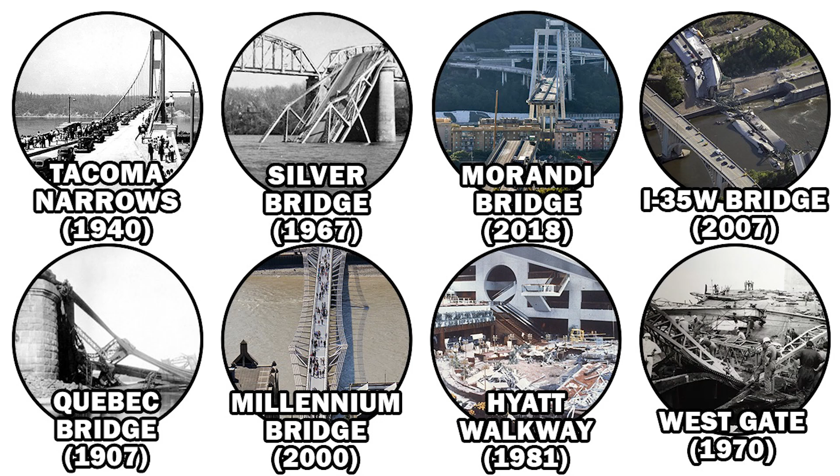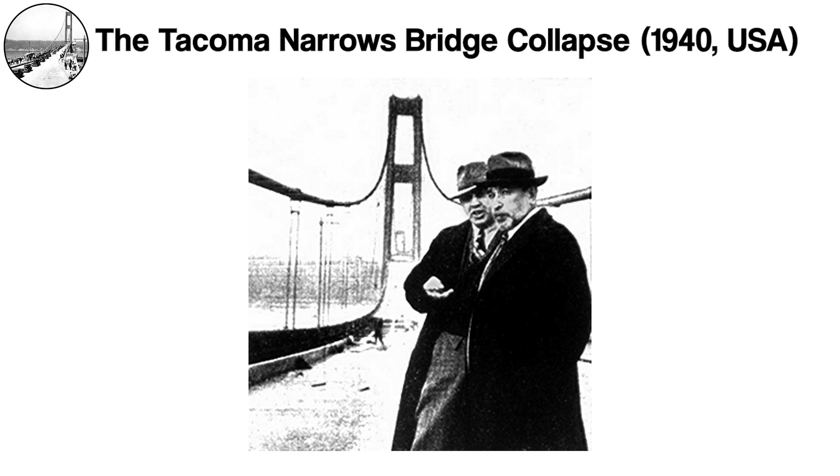Have you ever seen a bridge twist and turn like a ribbon in the wind? On November 7th, 1940, the Tacoma Narrows Bridge, nicknamed Galloping Gertie, shocked the world by doing just that, collapsing into Puget Sound. When it opened just 4 months earlier, it was praised as a sleek, modern design. However, engineers overlooked one crucial detail, which is how wind could affect its slim, flexible structure.

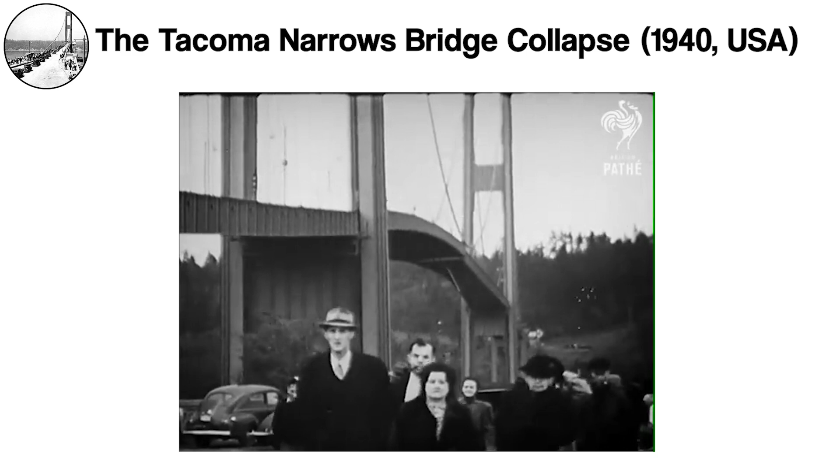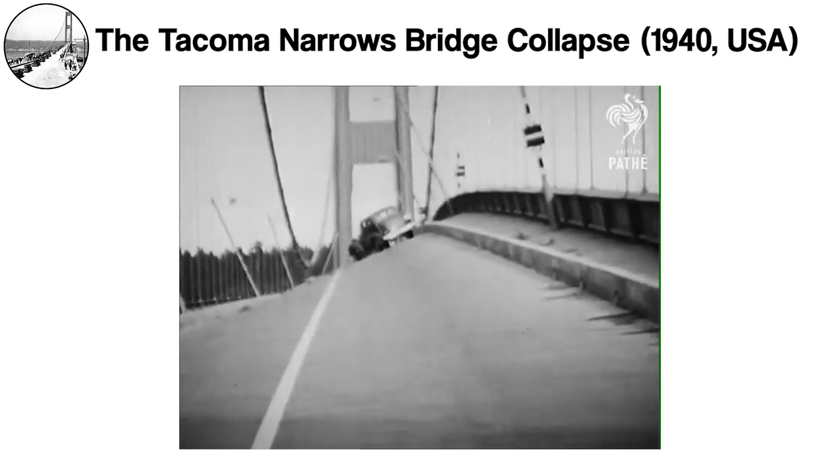On that fateful day, strong 40-mile-per-hour winds created aeroelastic flutter, a phenomenon where wind causes vibrations that grow stronger and more destructive. The bridge began to sway, twist, and buckle as horrified drivers abandoned their cars to escape. Within hours, the cable snapped, the road crumbled, and the entire structure tumbled into the icy waters below. While no people were hurt, a dog trapped in a car was tragically lost, adding to the heartbreak.

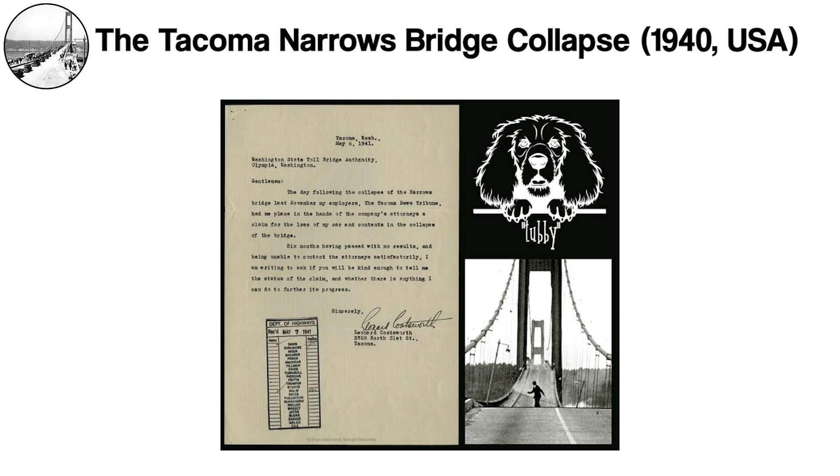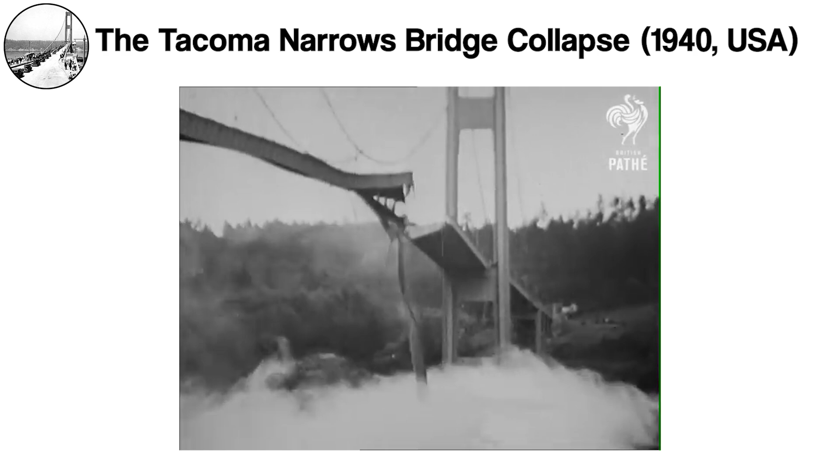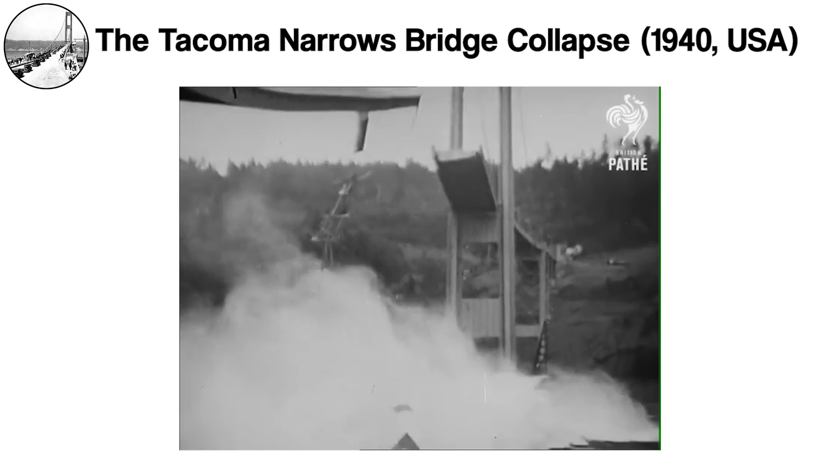The collapse became one of the most infamous engineering disasters in history, teaching a vital lesson that nature's forces must never be underestimated. The haunting footage of Gertie's collapse still fascinates people today, reminding us of the fine line between innovation and disaster. The dramatic footage captured by newsreels shocked the public and became a symbol of engineering gone awry, sparking widespread discussion about safety and innovation.

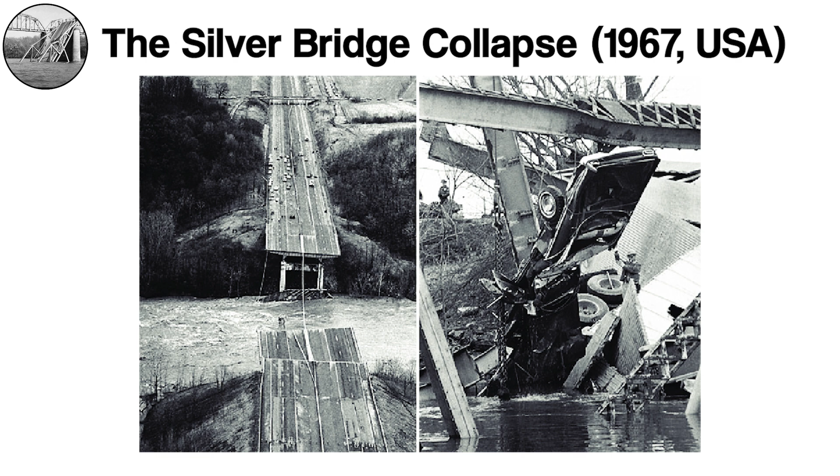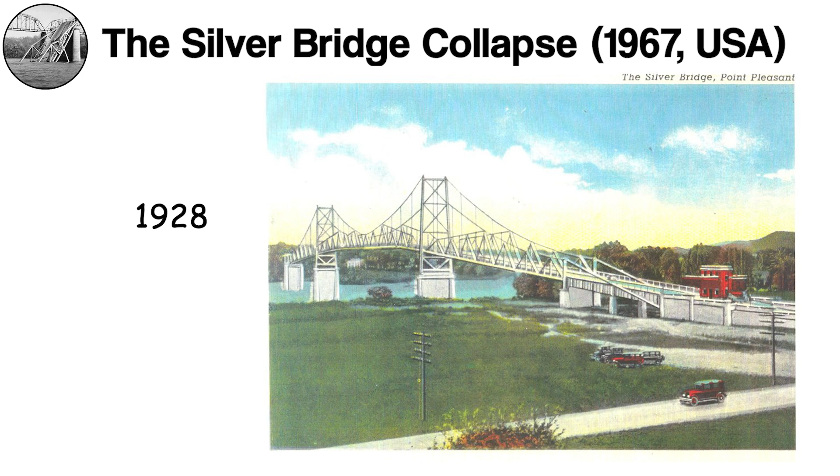What if the bridge you cross every day suddenly gave way, plunging cars into icy waters below? That nightmare became reality on December 15th, 1967, when the Silver Bridge, connecting Ohio and West Virginia, collapsed during rush hour, resulting in the loss of 46 lives. Built in 1928, the Silver Bridge was a marvel of its time, using a unique eyebar chain suspension design. But decades of wear, heavier traffic, and poor maintenance turned this engineering innovation into a ticking time bomb.

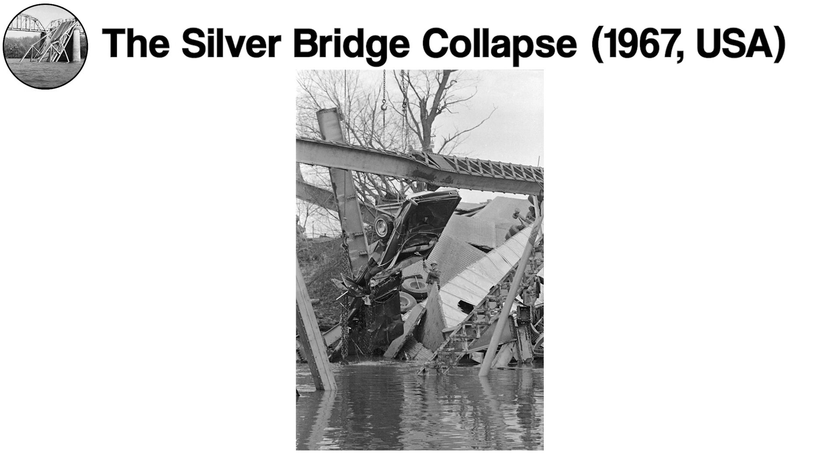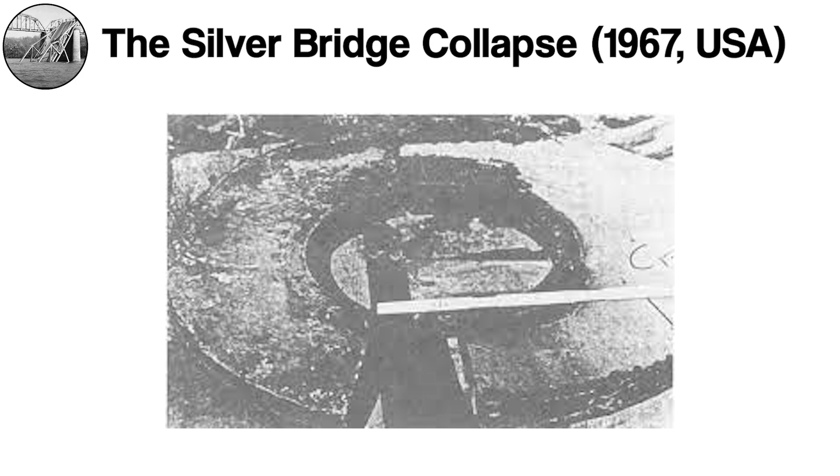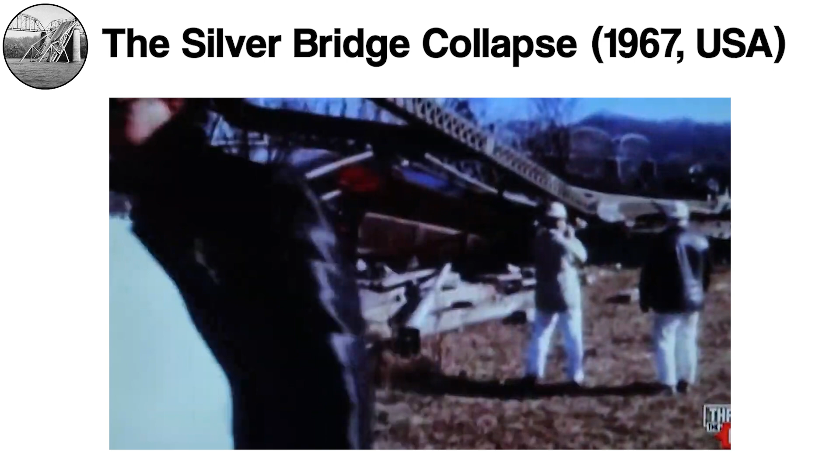On that fateful day, a single eyebar, a critical piece of the bridge's support system, fractured due to a microscopic crack. This tiny flaw caused a catastrophic chain reaction, and within a minute, the entire structure crumbled, sending vehicles and passengers into the freezing Ohio River. Rescue efforts were hampered by the swift current and freezing temperatures, making the tragedy even more devastating. Investigators discovered that the eyebar design had no redundancy, meaning if one piece failed, the whole structure would collapse.

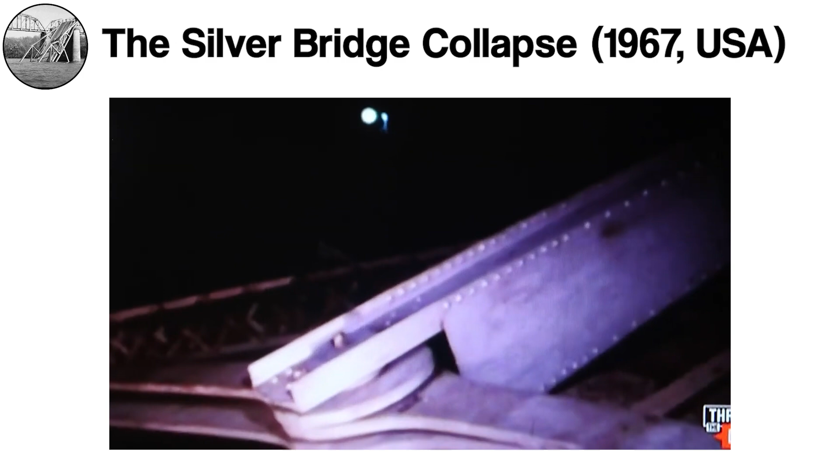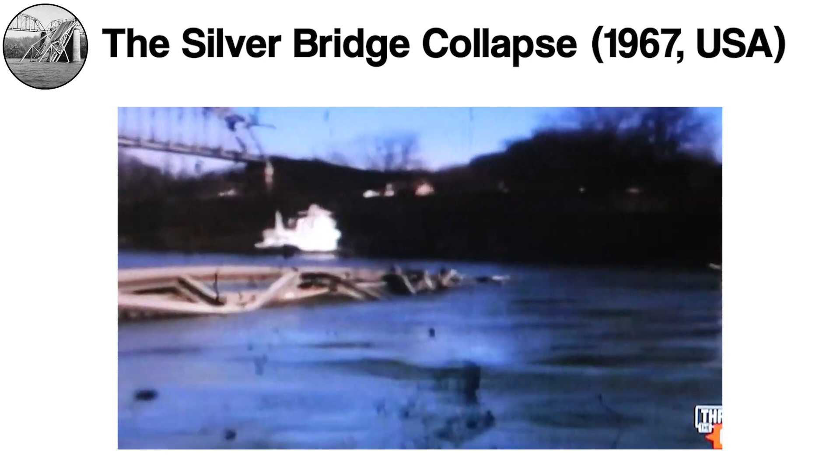The Silver Bridge disaster shook the nation, leading to sweeping reforms in bridge inspection and maintenance standards. Today, its collapse serves as a chilling reminder of the dangers of overlooking aging infrastructure and the need for constant vigilance. It's a lesson written in the icy waters of the Ohio River and the lives lost that winter day.

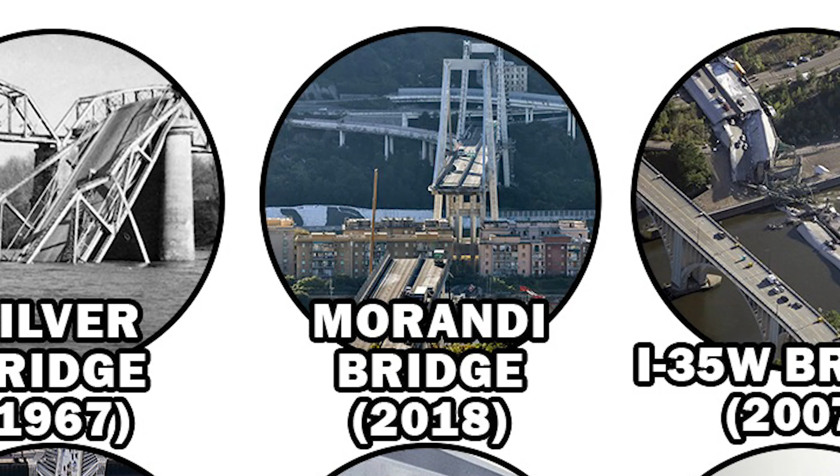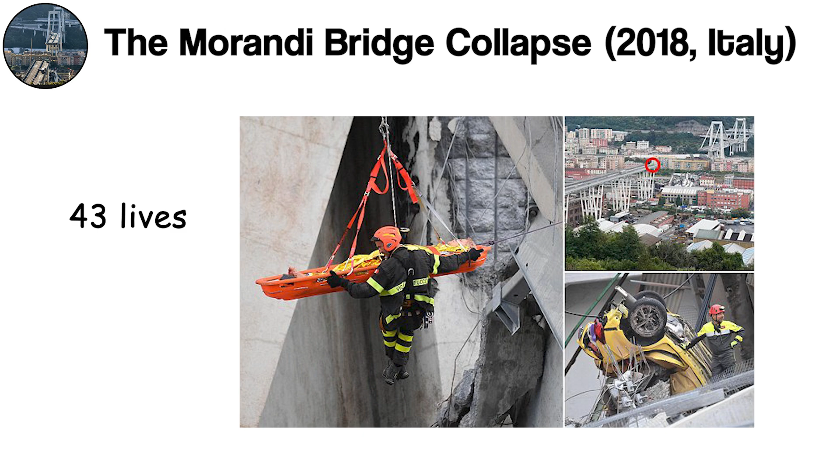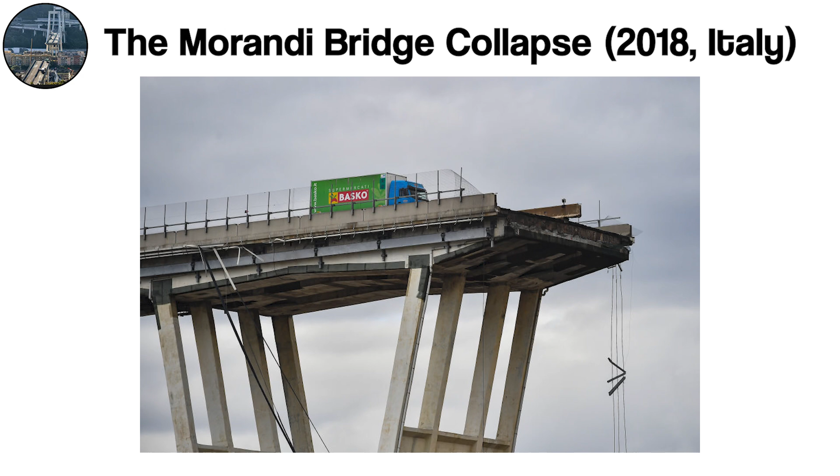On August 14th, 2018, during a heavy rainstorm in Genoa, Italy, the Morandi Bridge collapsed, resulting in the loss of 43 lives and leaving a nation in shock. The bridge, built in the 1960s, was once a symbol of modern engineering, stretching high above Genoa's busy streets and river, but decades of wear, inadequate maintenance, and design flaws made it a disaster waiting to happen.

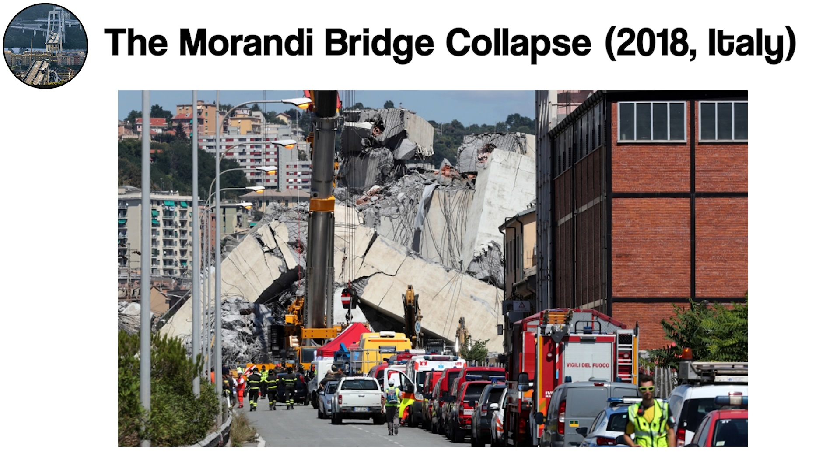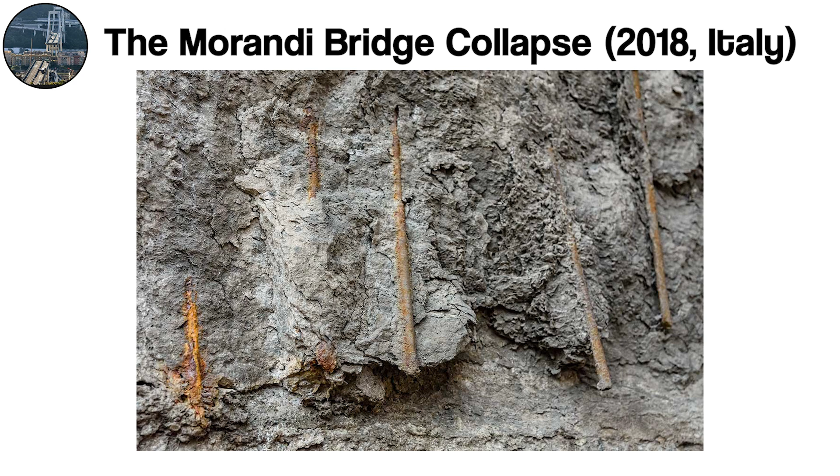On that fateful day, a 210-meter section of the bridge gave way, sending cars, trucks, and debris plummeting 45 meters to the ground below. Survivors described the terrifying moment as the bridge seemed to disappear beneath them. Investigators discovered that corrosion in the steel cables and aging concrete had weakened the bridge over time. Despite repeated warnings from engineers about its deteriorating condition, repairs were delayed with devastating consequences.

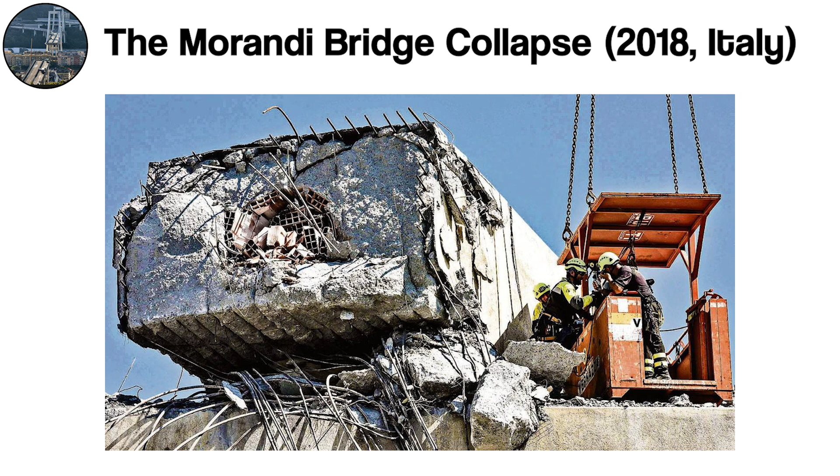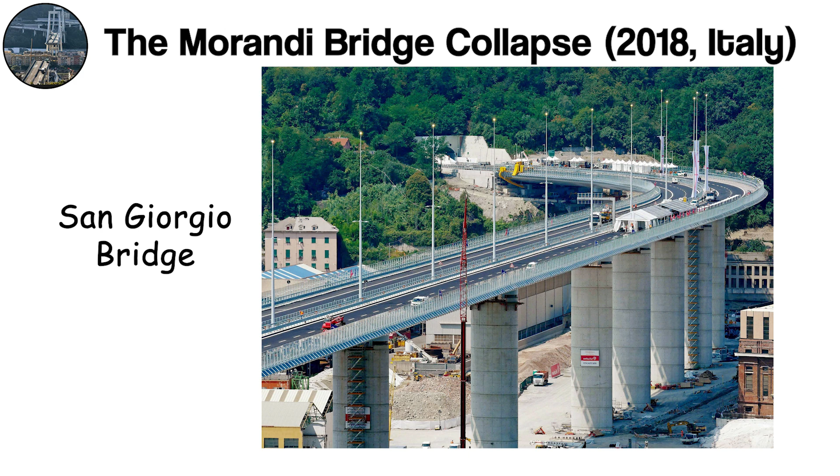The Morandi Bridge collapse became a wake-up call for infrastructure safety worldwide, sparking debates about accountability, maintenance, and modernization. Today, the new San Giorgio Bridge stands in its place, a somber reminder of the lives lost and the lessons learned. The disaster underscores a painful truth. Ignoring the warning signs of aging structures can lead to unimaginable tragedy.

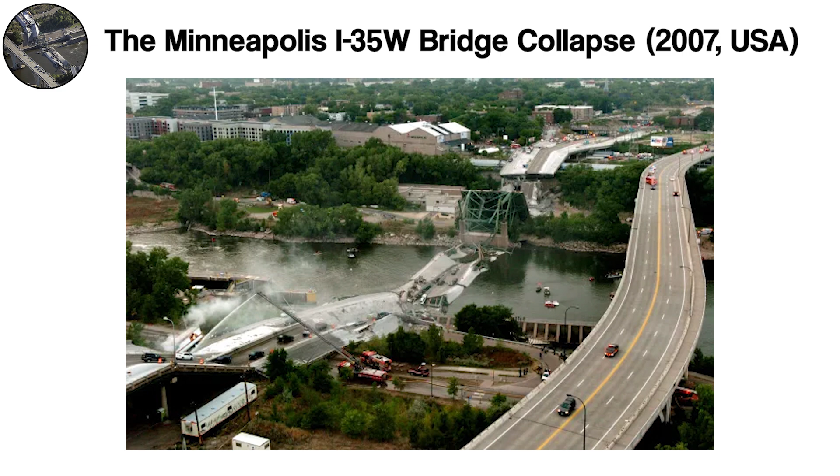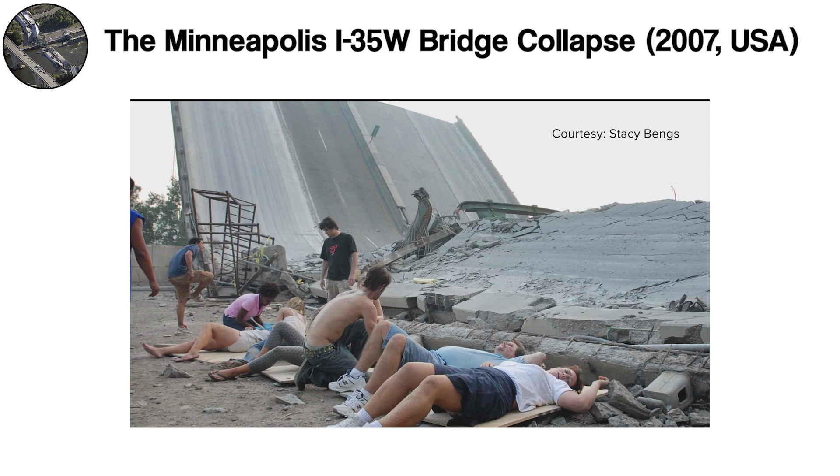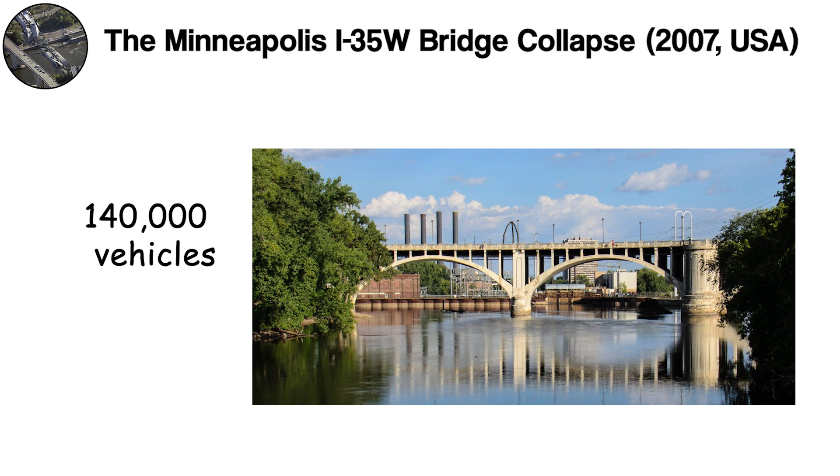It was an ordinary summer evening in Minneapolis on August 1st, 2007. Rush hour traffic crawled along the I-35W bridge, cars bumper to bumper, when suddenly the unthinkable happened. Without warning, the bridge gave way, collapsing into the Mississippi River below. In just moments, 13 lives were lost, 145 people were injured, and a nation was left grappling with how such a tragedy could occur. The I-35W bridge was a critical artery for the city, carrying over 140,000 vehicles daily. Built in the 1960s, it had been flagged for structural deficiencies years before the collapse.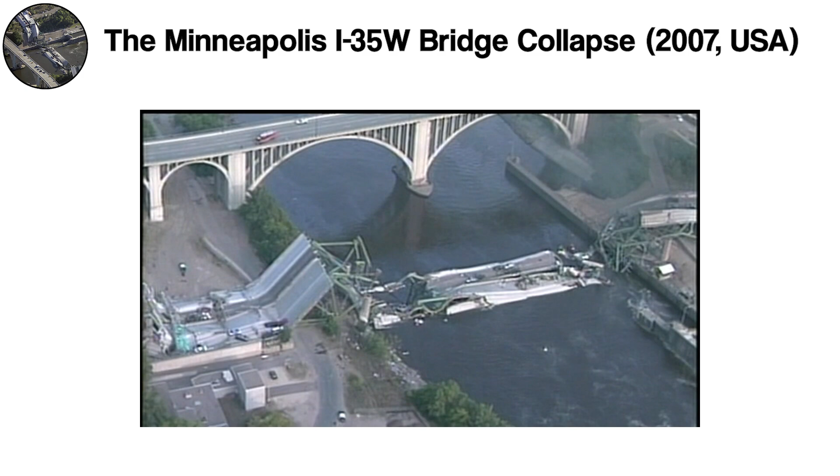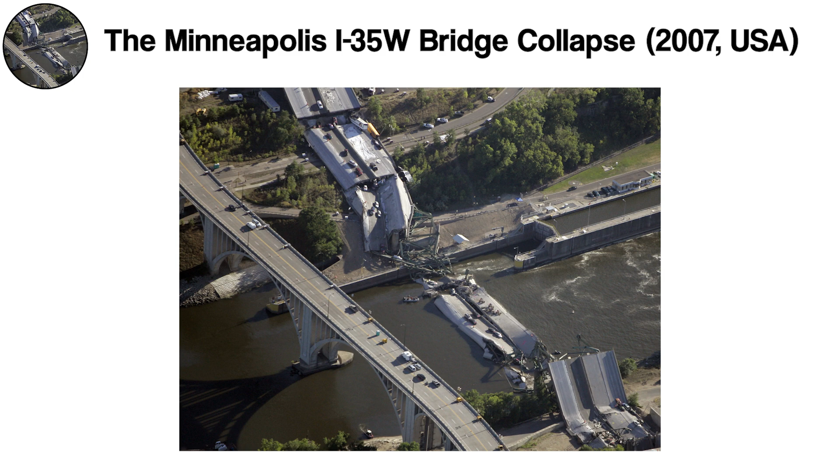But what made all of this happen? A design flaw in the steel gusset plates, key components that connected the bridge's beams. These plates were too thin to handle the increasing weight of modern traffic and repairs over decades. On that day, the bridge simply couldn't bear the load, and it failed catastrophically. Emergency crews worked tirelessly in the chaos, rescuing survivors from the river and twisted debris.

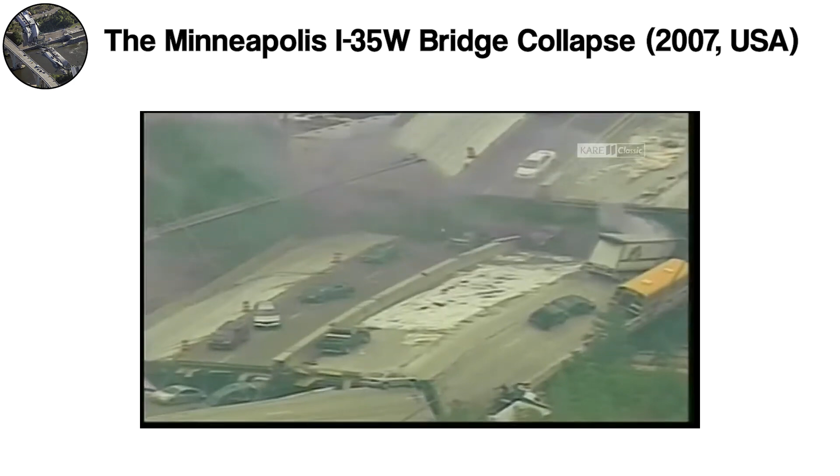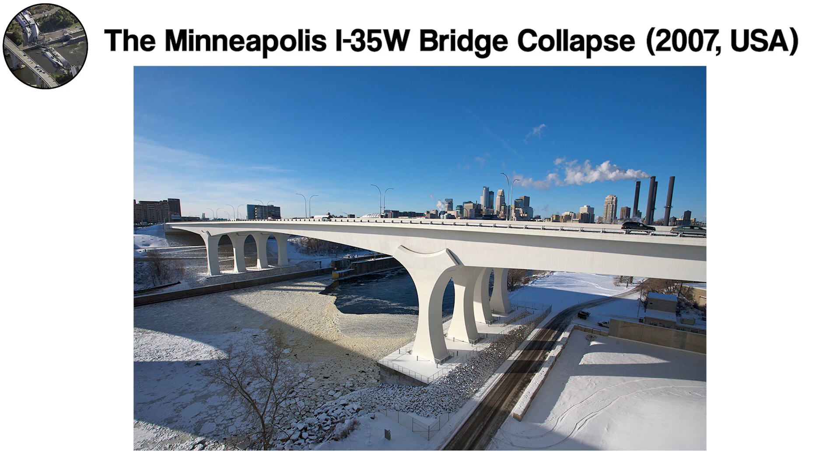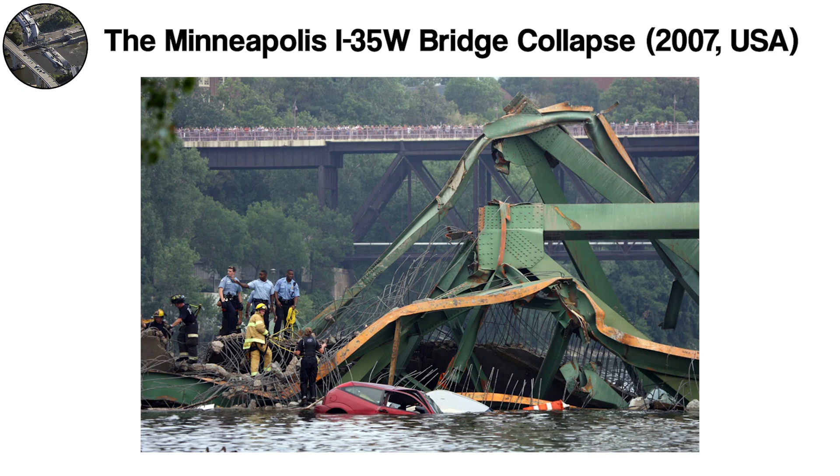The collapse prompted an urgent nationwide review of aging infrastructure, highlighting the dangers of deferred maintenance and design flaws in America's bridges. Today, the rebuilt I-35W bridge stands as a testament to resilience and innovation, but the haunting memory of that summer evening serves as a stark reminder. Infrastructure isn't just about steel and concrete, but it's about the lives it holds in balance.

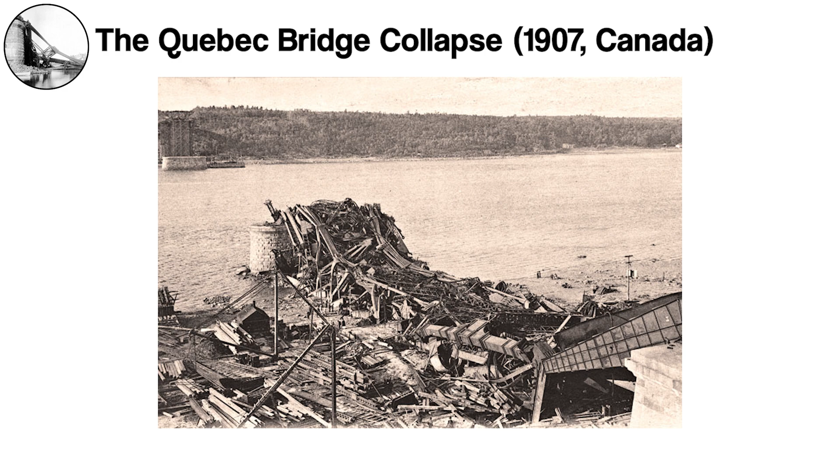What happens when an engineering marvel, designed to be the longest cantilevered bridge in the world, suddenly falls apart? That was the devastating reality on August 29, 1907, when the Quebec Bridge collapsed during construction, resulting in the loss of 75 workers and shaking the world. The bridge was a grand vision, set to span the St.

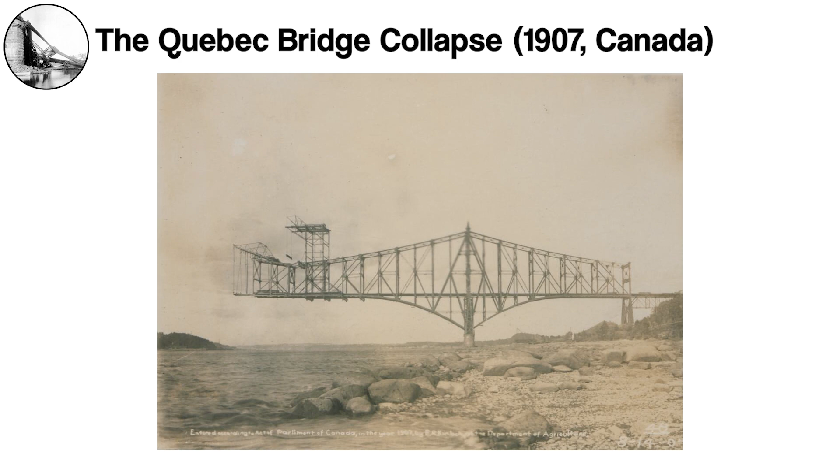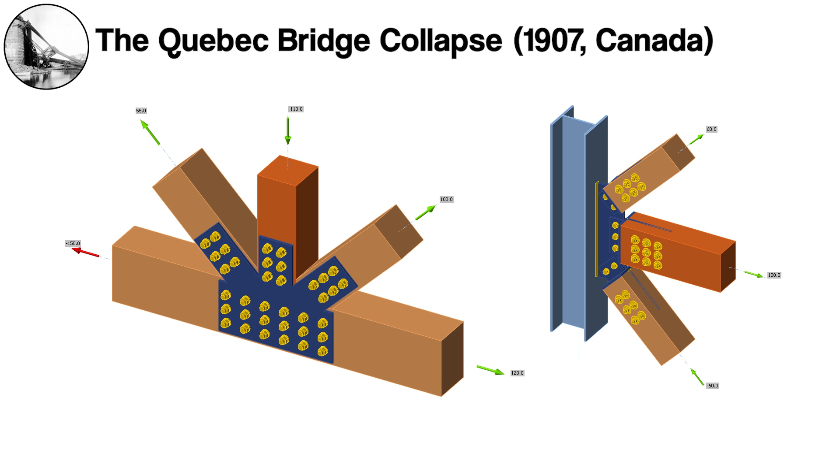Lawrence River in Quebec, Canada, and stand as a symbol of engineering excellence. But the dream was built on a flaw, an overambitious design and poor calculations. The bridge's framework relied on steel gusset plates, which were crucial to its structural integrity. However, these plates were too thin to withstand the weight of the bridge's span.

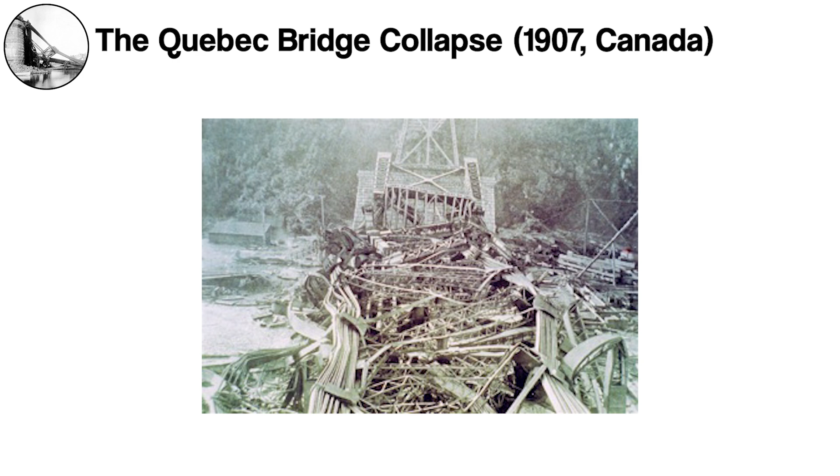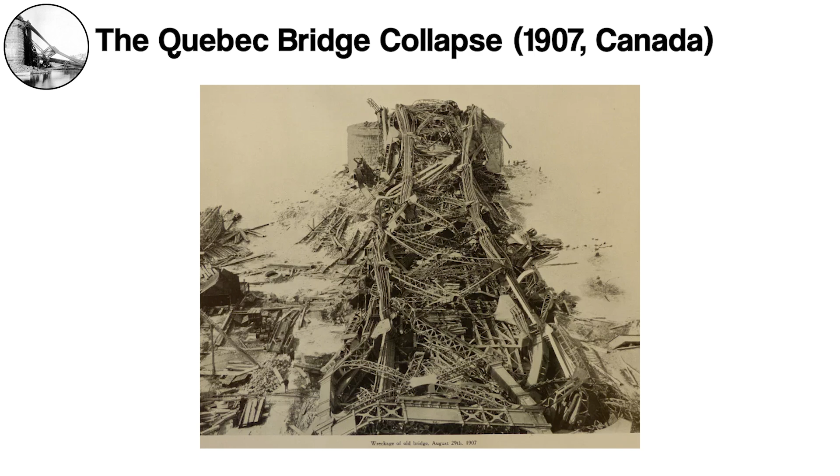On that fateful day, the stress proved too much, and the central span of the bridge plummeted into the river below. Workers, who had been diligently building the bridge, were caught in the collapse, and 75 men lost their lives in an instant. The tragedy was incomprehensible, and it sent shockwaves through the engineering community.

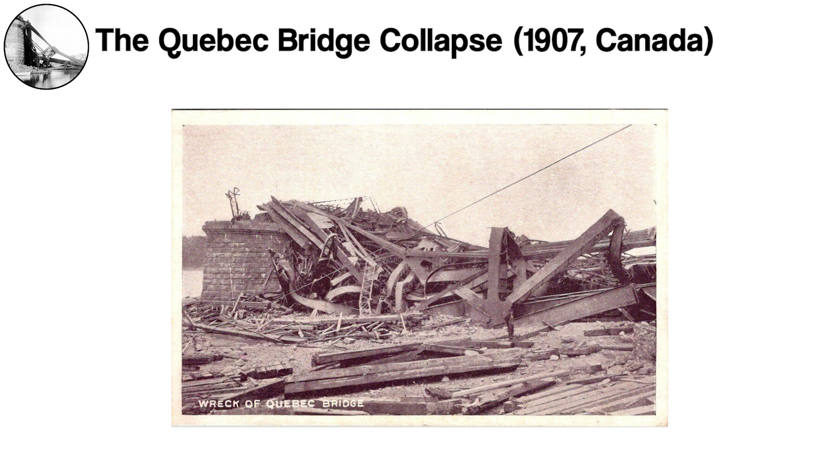Despite the catastrophic failure, the bridge was eventually rebuilt and completed in 1917. However, the Quebec Bridge disaster remains one of the most significant and heartbreaking engineering failures in history. It highlighted the dangers of cutting corners and overlooking safety, serving as a tragic reminder of how ambition can quickly turn into disaster when critical details are ignored.

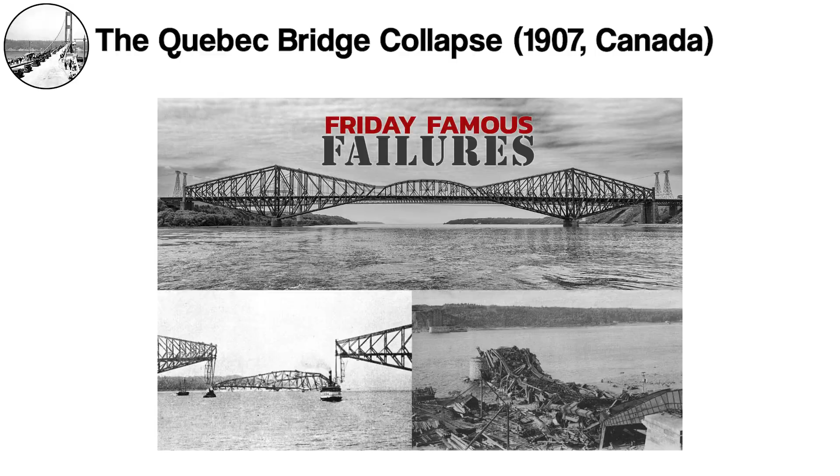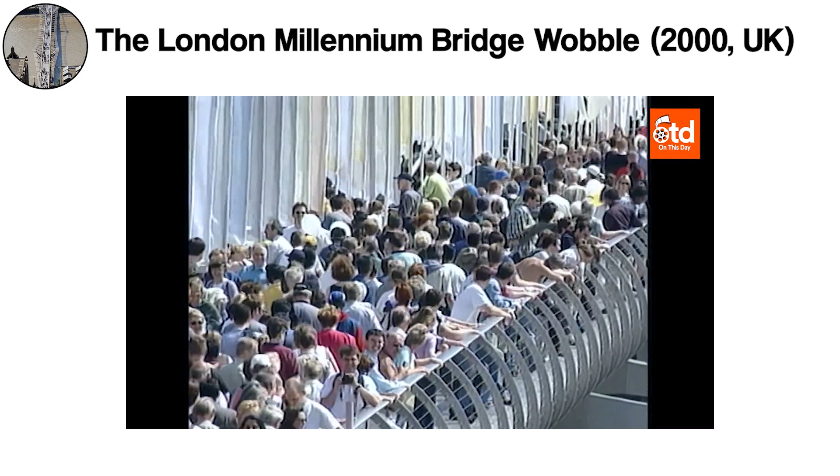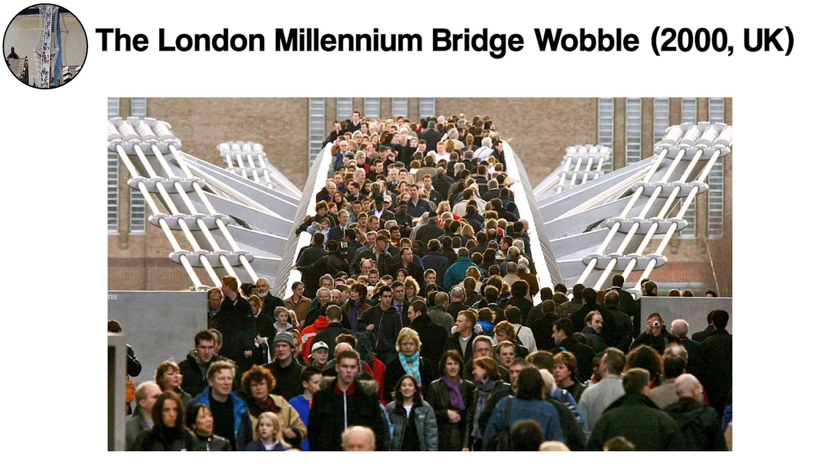Imagine walking across a brand new bridge, built to mark the turn of the Millennium, when suddenly the ground beneath you starts to sway. That's exactly what happened on June 10, 2000, when the London Millennium Bridge opened to the public and immediately became notorious for its unsettling wobble. The sleek pedestrian bridge, linking St. Paul's Cathedral with the Tate Modern, was meant to be a modern marvel, designed to carry thousands of people across the Thames with ease. But just days after its grand opening, something unexpected happened.

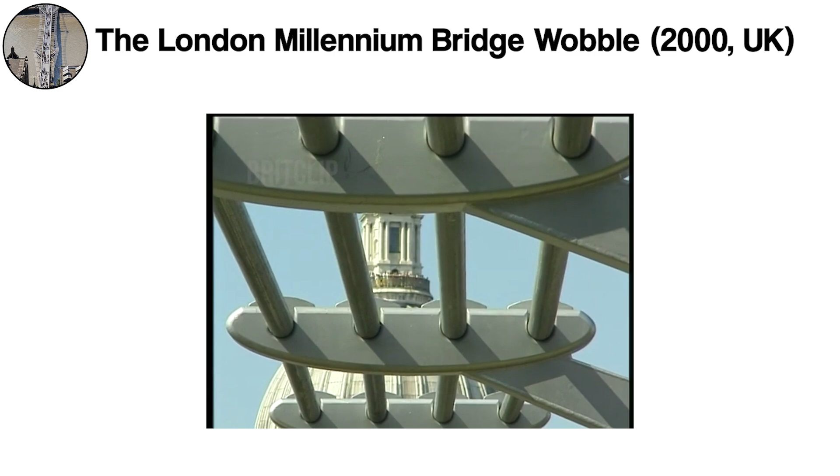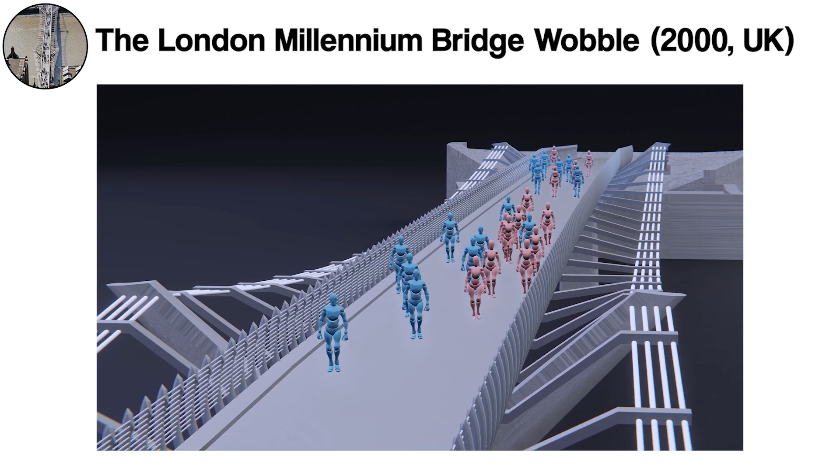The bridge began to sway under the weight of pedestrians. What seemed like a harmless design flaw quickly turned into a public safety issue, forcing the bridge to close for months. But why did this happen? Engineers discovered that the bridge's design didn't account for the way people move. As pedestrians walked in sync, their collective movement amplified the wobble, turning the bridge into a dizzying, unstable platform.

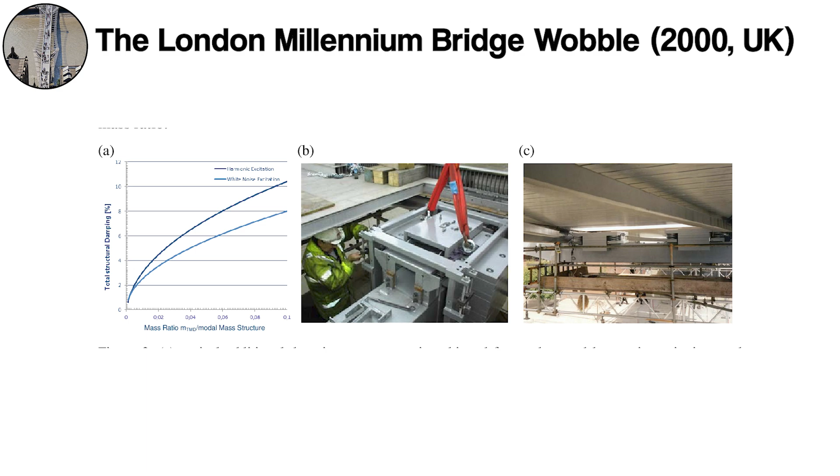After extensive modifications, including adding dampers to reduce the movement, the bridge was reopened in 2002. Today, the London Millennium Bridge is an iconic structure, but its brief wobble serves as a reminder. Even the most cutting-edge designs can have unpredictable flaws, and human behavior can play a surprising role in engineering disasters.

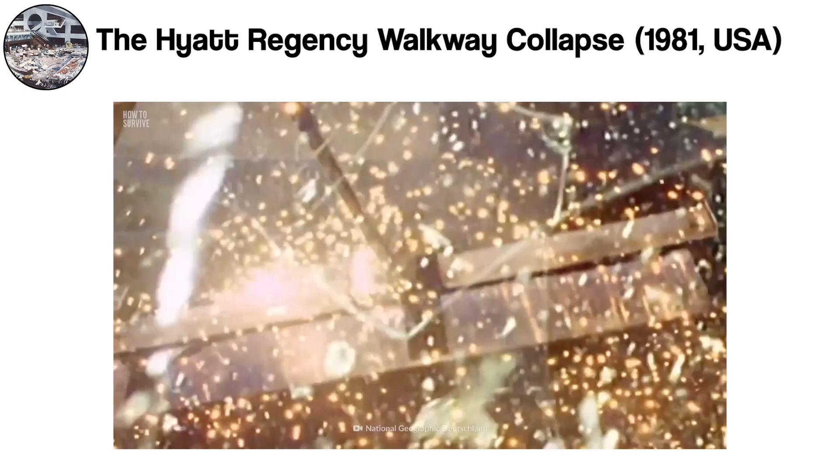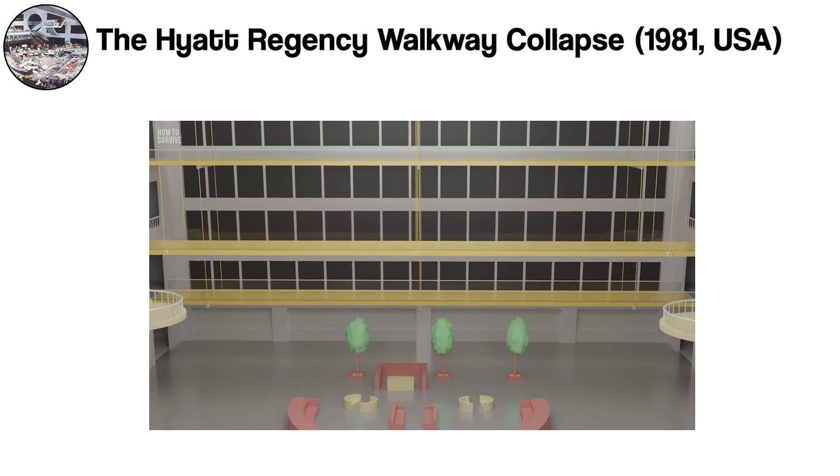What if the celebration of a lifetime suddenly turned into a deadly disaster? That's exactly what happened on July 17, 1981, when two walkways at the Hyatt Regency Hotel in Kansas City, USA, collapsed during a busy event, resulting in the loss of 114 lives and injuring over 200 people. The Hyatt Regency Hotel was a marvel of modern architecture, designed to showcase a stunning atrium with walkways suspended high above the ground. But a deadly flaw lay hidden in its design.

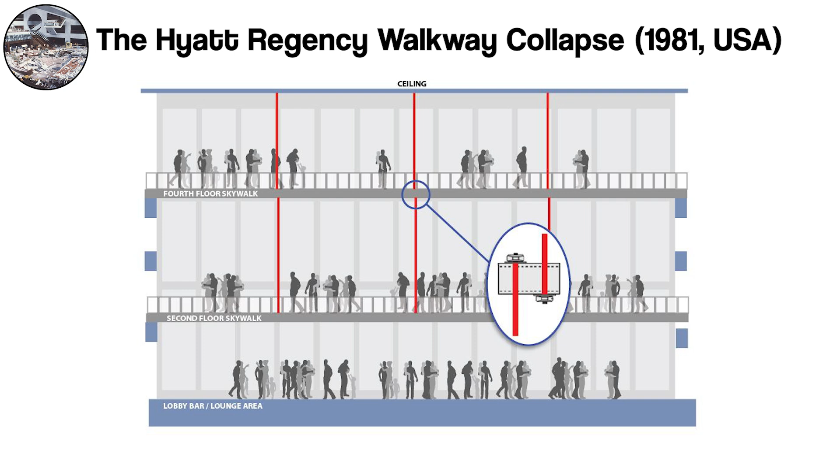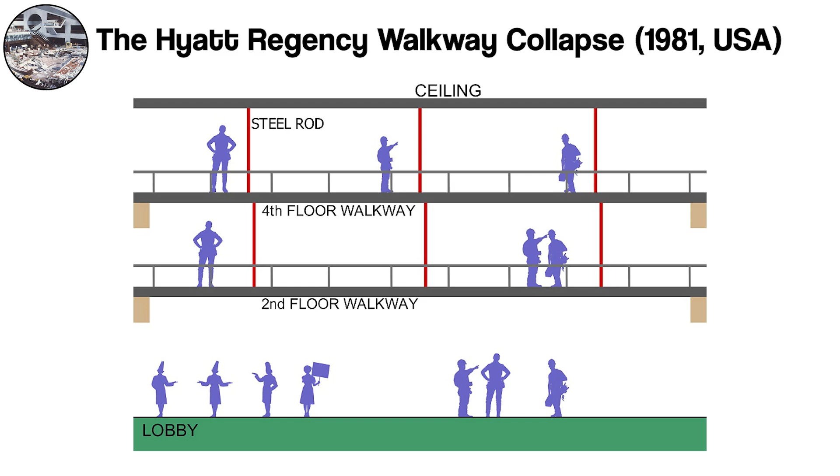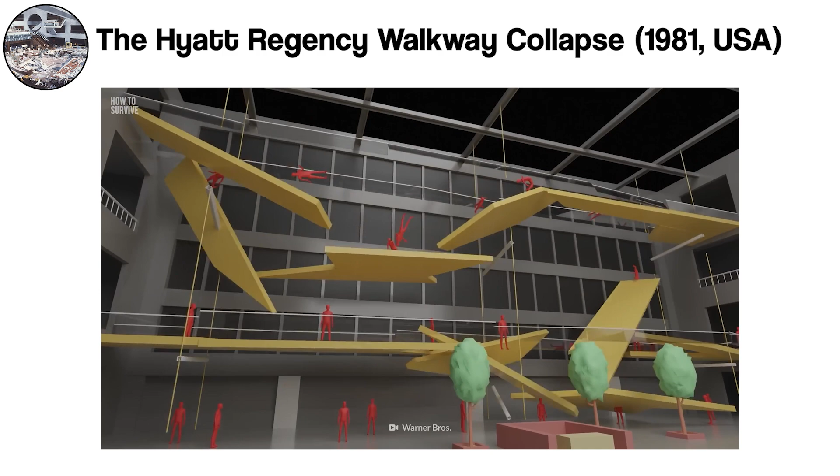The original plan for the walkways called for the suspension cables to connect to a single point. However, engineers made a last-minute change, adding a second set of suspension rods for support, without properly calculating the impact on the structure's load-bearing capacity. On that fateful night, the walkways, crowded with guests attending a ballroom dance, buckled under the weight they were never designed to bear. In a matter of seconds, 2 levels of walkways crashed to the floor below, trapping and causing loss of life in the chaos.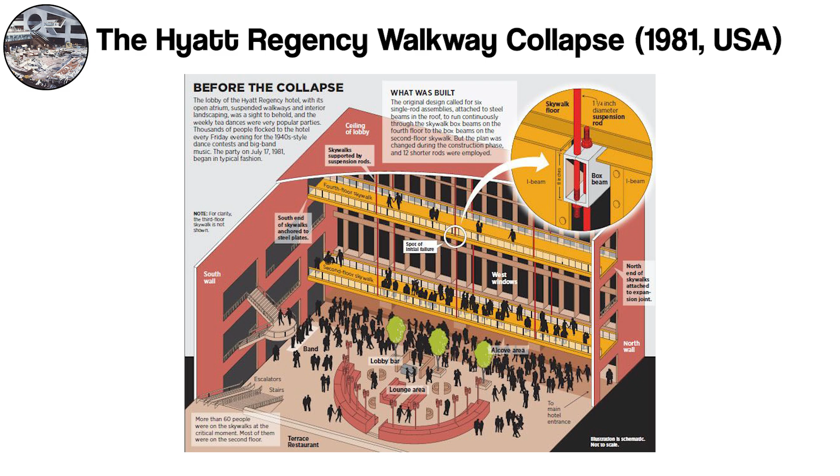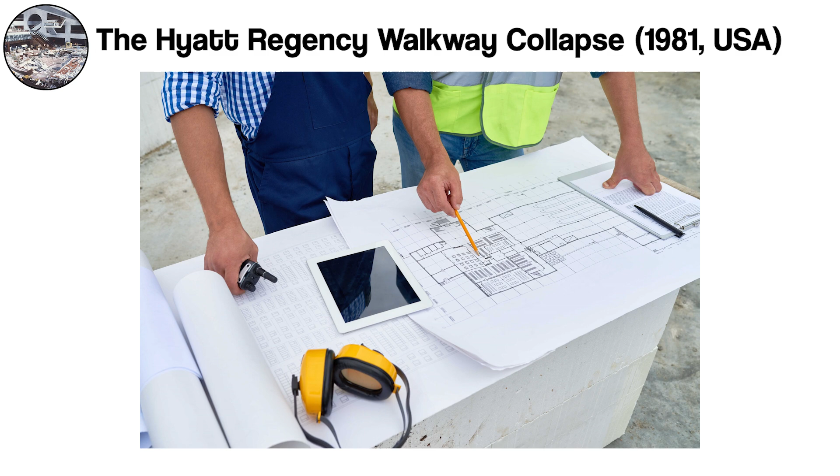The collapse exposed serious flaws in engineering oversight, leading to an investigation that revealed structural miscalculations and poor communication between the design and construction teams. The disaster prompted significant changes in engineering standards and building codes. Today, the Hyatt Regency walkway collapse stands as a haunting reminder of how a small design change, if not carefully considered, can lead to catastrophic consequences.

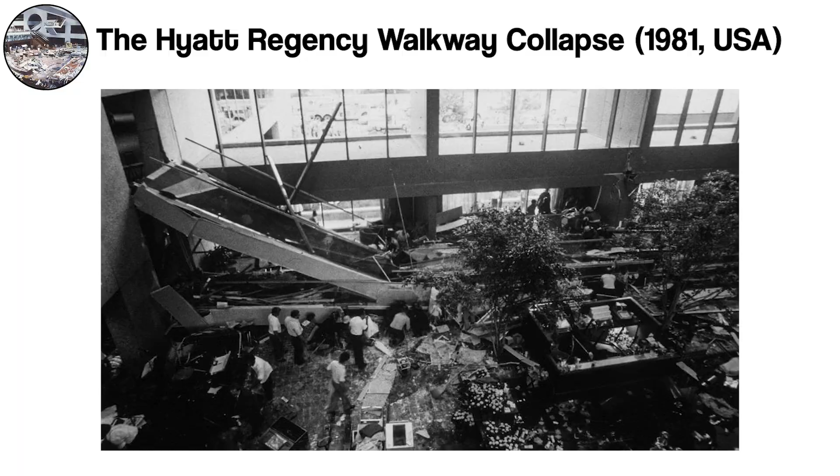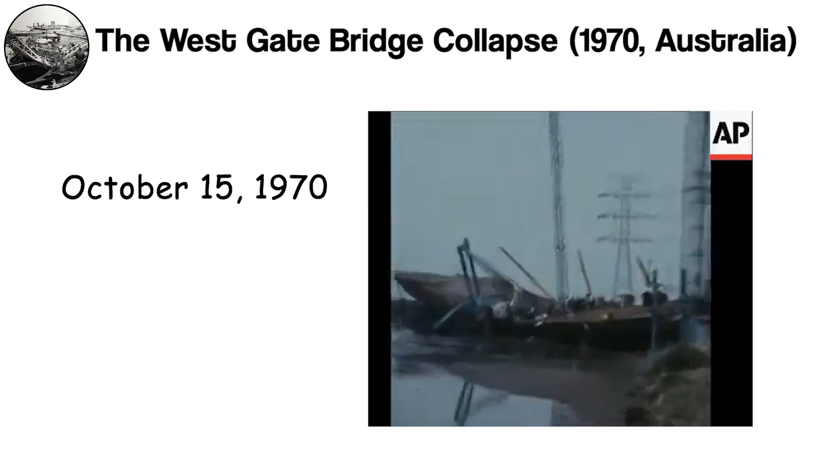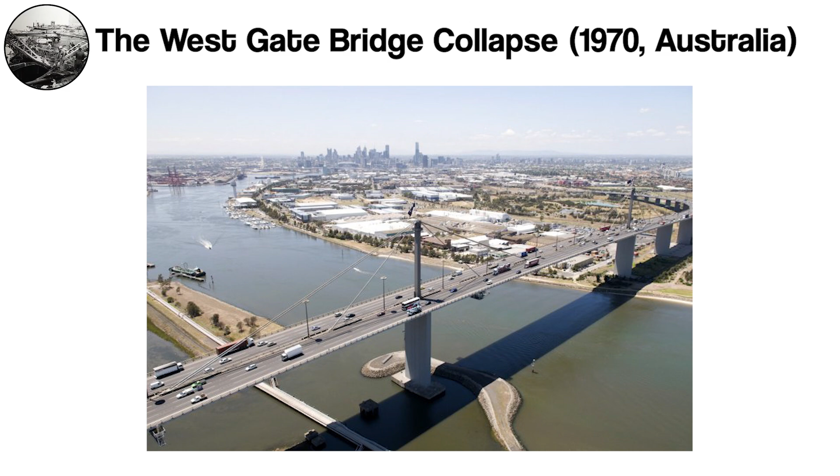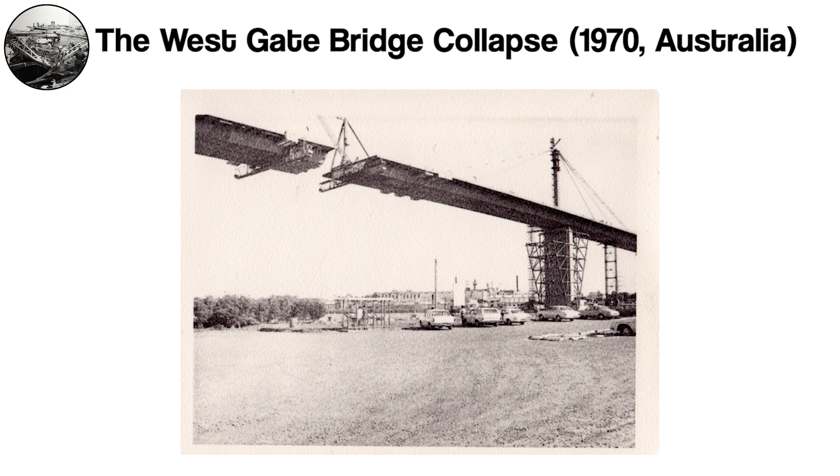Envision a bustling construction site where workers diligently piece together a bridge intended to symbolize progress and connectivity. This vision turned into a nightmare on October 15, 1970, when the West Gate Bridge in Melbourne, Australia, collapsed during construction, tragically claiming the lives of 35 workers. The West Gate Bridge was designed to be a crucial link across the Yarra River, aimed at facilitating traffic flow and boosting economic growth. However, the ambitious project faced numerous engineering challenges and design complexities. The bridge's construction utilized a novel box girder design, which, while innovative, was not fully understood at the time.

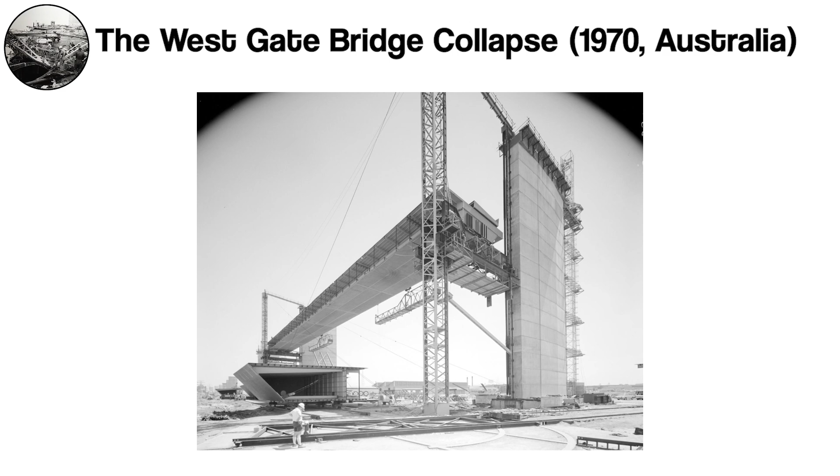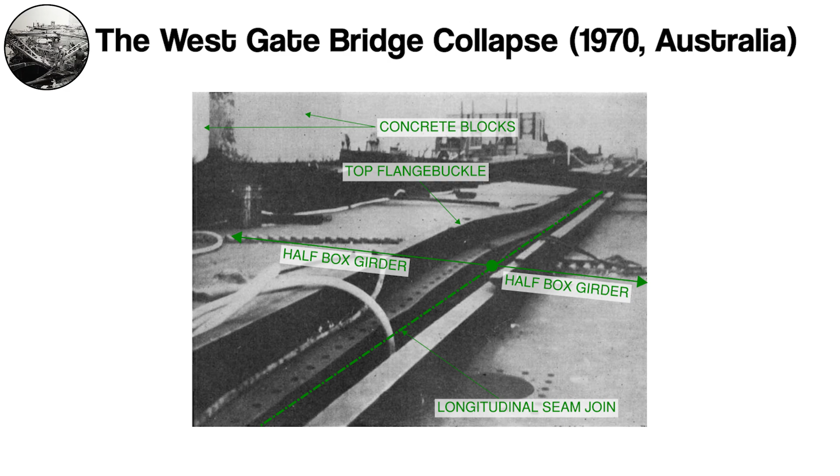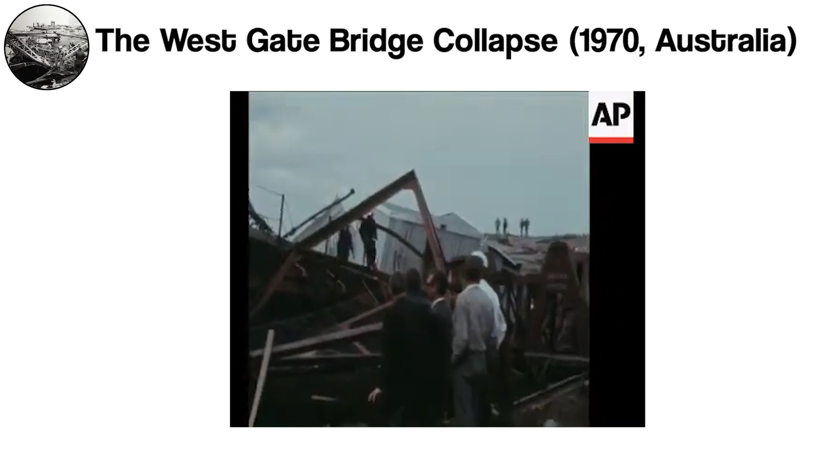On that ill-fated day, a critical error occurred during the construction process. Workers attempted to correct a misalignment between 2 bridge spans by removing bolts and adding weight to force the sections into place. This action inadvertently destabilized the structure, leading to a catastrophic collapse. The central span of the bridge plummeted into the river below, tragically claiming the lives of the workers on it. The West Gate Bridge disaster sent shockwaves through the engineering community, prompting a thorough investigation and leading to significant changes in construction practices and safety regulations.

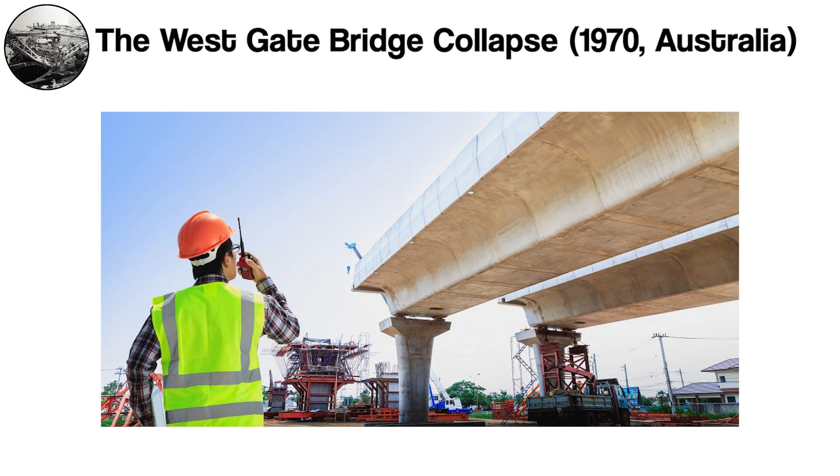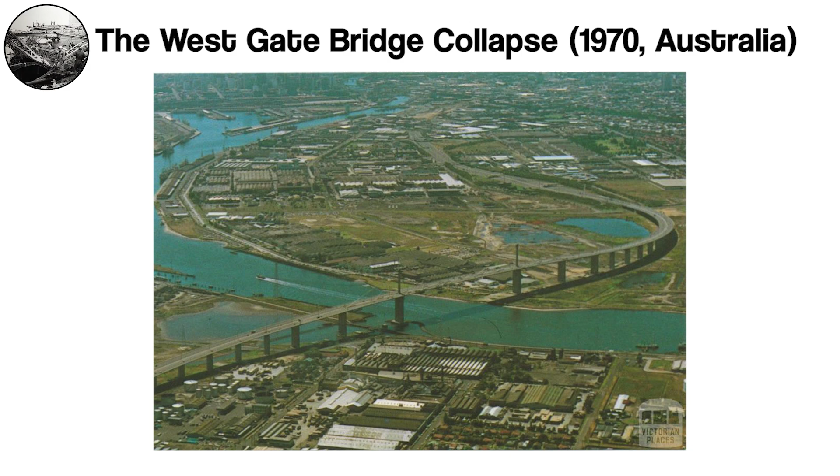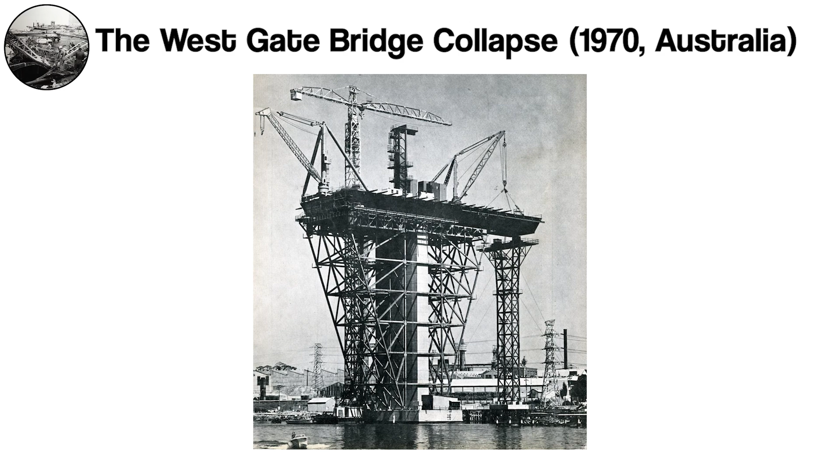The tragedy underscored the importance of meticulous planning, communication, and adherence to safety protocols in large-scale infrastructure projects. Today, the rebuilt West Gate Bridge stands as a testament to resilience and learning from past mistakes. It serves as a somber reminder of the human cost of engineering failures and the critical need for vigilance and innovation in bridge construction. Which infrastructure failure story impacted you the most?